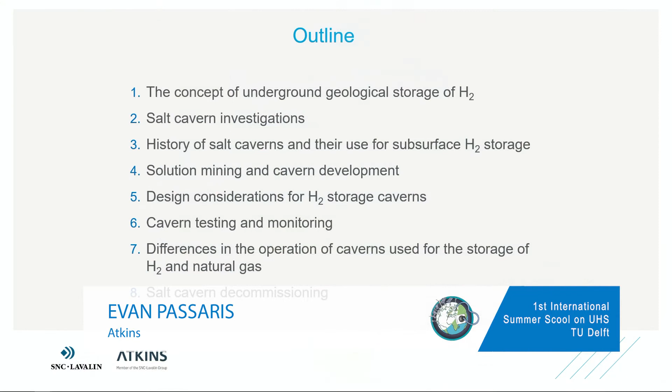Right. Very briefly, there's an outline of what is to come. You can read it later. Let's go straight into the actual presentation because we're running out of time. I was told very clearly by Hadi.

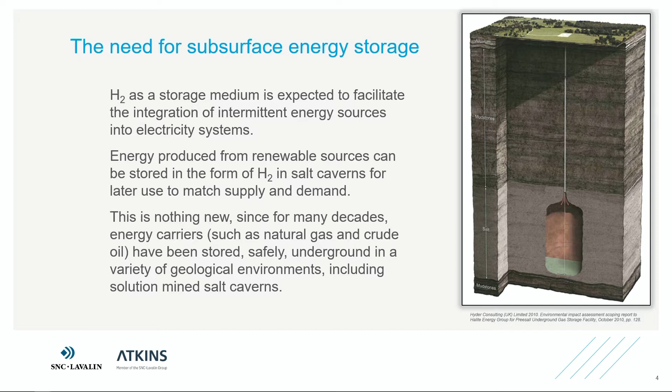So the concept of underground geological storage of hydrogen is obviously there because we need it. My predecessor here in the presentation explained why we need it, so I'm not going to say anything more about this. I would like to go straight and talk about what kind of investigations we normally need to implement in order to look at the caverns.

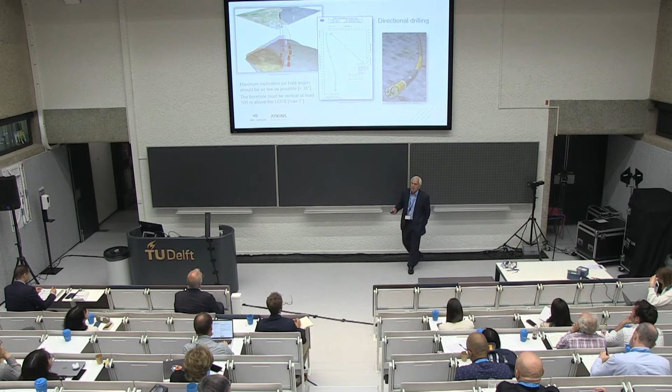We always start with drilling, of course. And the drilling nowadays is done by directional drilling. You have a platform from where you actually pad. You can drill several holes, which eventually are going to be the holes which will lead you to the cavern. The important thing is when you're using directional drilling to make sure that there are certain limits. The maximum inclination has to be kept below 35 degrees if you want to have an absolute control of the actual installation later of the completion.

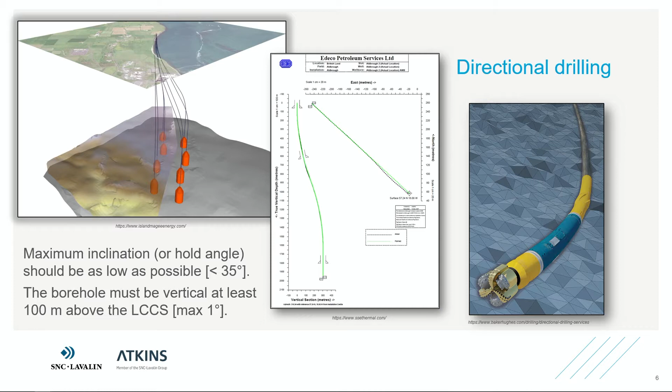And another point, as you are approaching with the drill hole in the location where the cavern is going to develop, you have to leave at least 100 meters above the cavern where it has to be vertical. The hole has to be vertical for absolute control of the operations later. Maximum inclination should be 1 degree there.

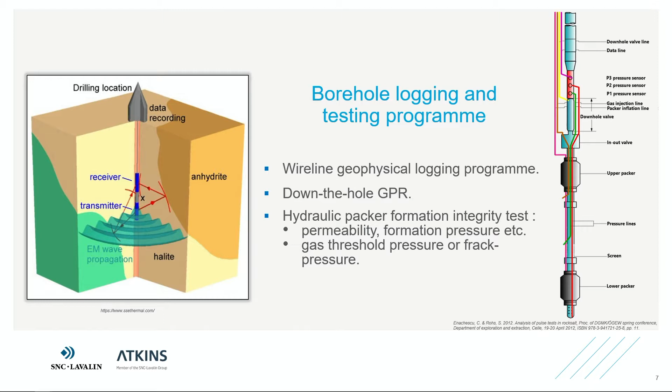Once you drill the hole, a number of down-the-hole tests need to be implemented in order to get the details of the properties of the geological formations that lead from the top to the very bottom. And once you're finished with the classic geophysical logging program, there's another set of tests that you can do. They're optional. Down-the-hole ground penetration radar is one of the techniques which you normally employ in order to find any abnormalities that may exist in the area where we'd go and develop the caverns.

And of course, we need to use the hydraulic packer formation test, which will allow you to determine the in situ permeability of the salt and also to define what is the threshold pressure, or if you like, the frac pressure of the salt in particular.

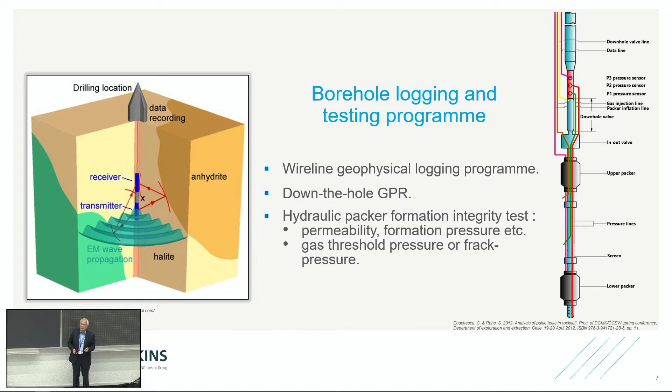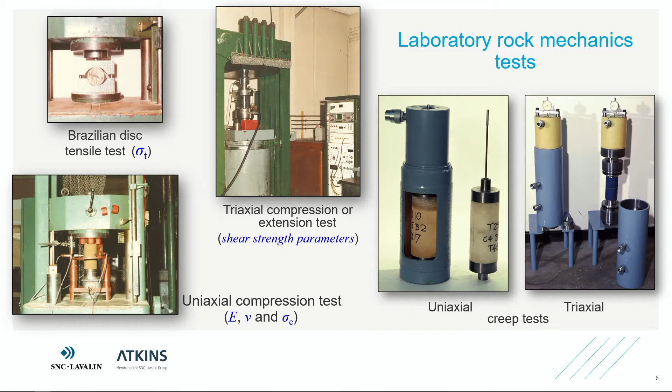Once you developed the drill hole and you finished with your tests down the hole, every core which has been collected needs to be taken to the laboratory. There's some physical tests, there's some mineralogical tests, the tests which are used for the design of the solution mining techniques that are going to follow, but equally important, we need to do some mechanical tests to find the characteristics of the salt in particular and some of the other geological materials.

We need to know the quasi-static properties of the salt. By quasi-static properties, I mean, for example, the Young's modulus, the Poisson's ratio, tensile strength, uniaxial compressive strength, and of course, the shear characteristics, shear strength.

But equally important, you need to know the creep characteristics of salt. Salt is a unique material that creeps continuously when it's loaded, and we need to define the characteristic parameters which are used in the modeling of the time-dependent behavior of salt by using special techniques.

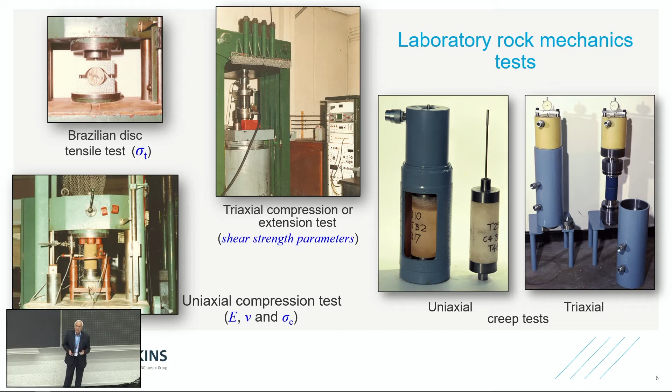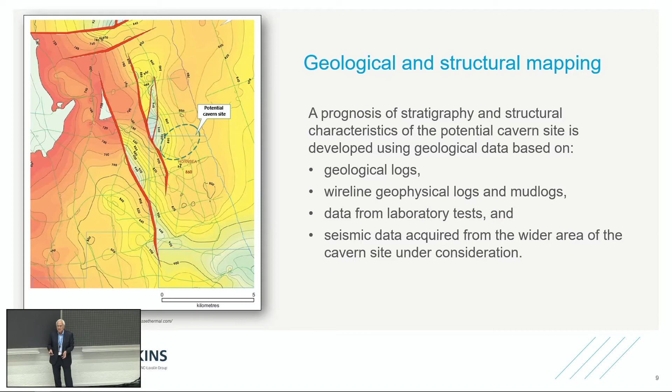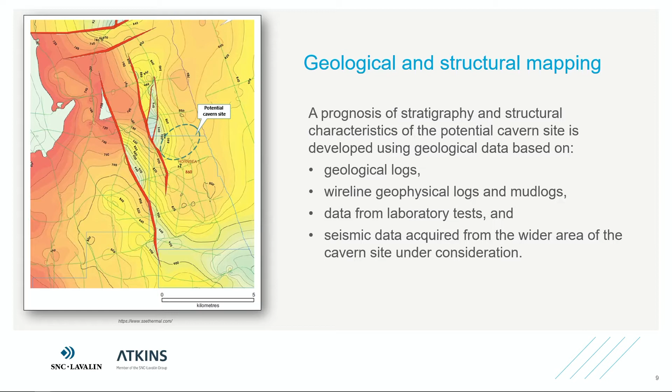Having gathered all this information, which is the results from the drilling of the holes, the in situ tests inside the wells, the laboratory tests, and of course, all the information that we have from the seismic surveys in the area, we can build a holistic model of the geological area we're going to develop the caverns so that we can decide where is the best optimum location, if you like, for developing our caverns.

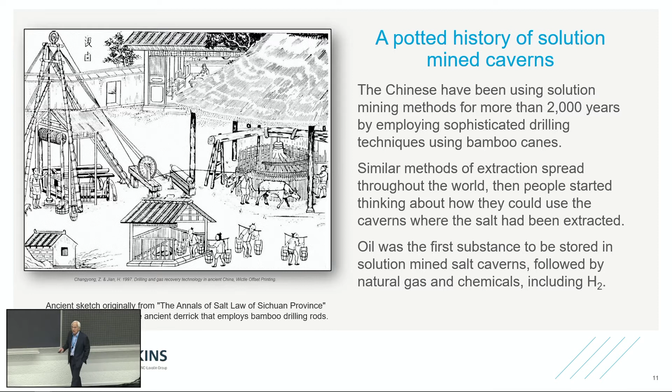The history of salt caverns is an old one. 2,000 years ago, the Chinese started extracting salt with bamboo techniques, bamboo sticks. Originally they were interested in the salt, but they ended up producing an empty space. Years later, when the rest of the world started using the same solution mining technique, they thought: wait a minute, we create a big space, can we use it to store something inside?

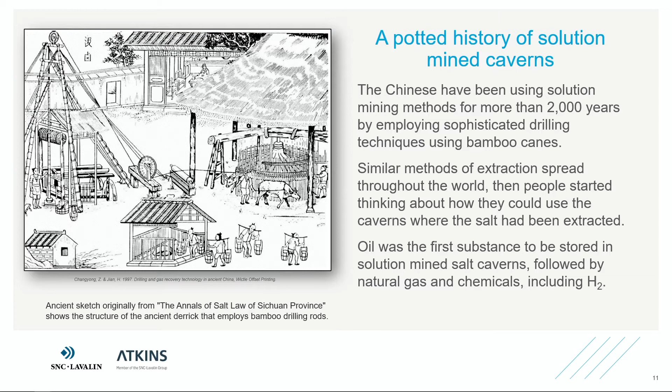They started storing originally oil and hydrocarbons, natural gas, and of course since the mid-60s, mid-70s, we started using hydrogen. Hydrogen was stored for the first time in the UK, and it's there to be used, the technique, nothing new about it.

Already we have 3 large caverns in the United States in salt domes. At the moment they're operated by ConocoPhillips, by Praxair, and of course by Air Liquide. They're not used for producing energy. It's stored and used specifically for various processes required by the companies.

In the UK, since the early times when ICI used to run the show for the salt caverns in the United Kingdom, we had 3 caverns. We still have them there. They're operating nicely in Teesside. They're small caverns, no more than 75,300 cubic meters capacity. They're at a relatively shallow depth, no more than 365 meters.

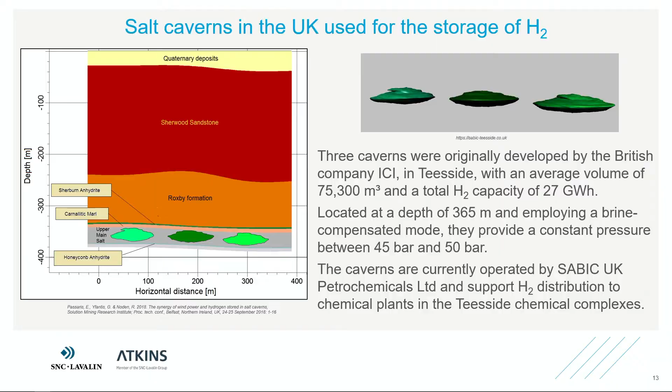They are peculiar shapes, as you can see, like flat pancakes. The reason why they're still like this is because the thickness of the salt is relatively small, and if you want to maximize the volume, you have to make them large diameter and flat. They're also quite unique in the sense that the roof of the caverns is very close to the overburden, which is a problem, because you have to keep at least 90 meters from the overburden.

And for this reason, we can't use these caverns as dry storage - they have to be wet storage. In other words, we're using brine as the means of injecting brine inside and expelling the hydrogen, or if you want to later inject the hydrogen, the brine has to be thrown out. Of course, they're not actually throwing out the brine - they have large ponds of saturated brine that they use for that purpose.

So that's the case of salt caverns in the UK. When you are in the business of developing caverns to be used as a storage facility, we employ the technique of solution mining. It's a straightforward technique: you drill a hole, you lower 3 tubes. The first tube is used for injecting water.

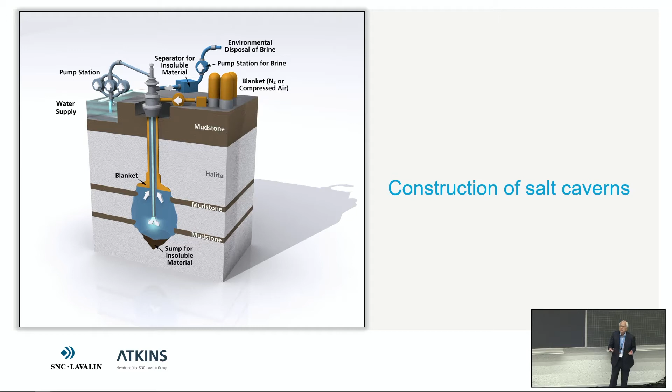You don't need to use fresh water, you can use seawater. Seawater is not fully saturated, therefore capable of dissolving salt. Once you've dissolved the salt, you produce brine. The brine then comes out on the surface through the second tube, and you allow some of the insolubles which are in with the brine to settle down before you send it to the pump house.

From the pump house, you either dispose of it back to the sea in an environmentally friendly way, or if you're lucky enough to have nearby industry that uses the brine to produce sodium and chlorine from it, no problem. The third tube is used to lower into the cavern during development the so-called blanket.

It's an inert material - we usually use nitrogen or sometimes compressed air. In the past we used to use oil. That is to actually lower or raise the interface of the brine and the blanket, to allow you to control the shape of the cavern. You can actually control the shape of the cavern nowadays relatively well, and you can produce practically any shape you like within limits.

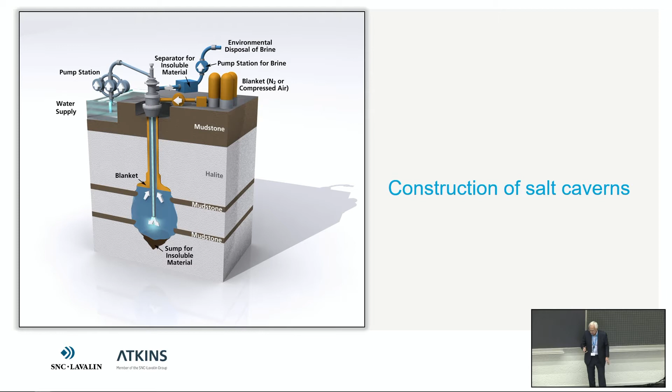So once the brine cavern has been created, you have to get rid of the brine. You inject the hydrogen inside, and as the hydrogen is injected into the brine cavern, it forces the brine to go out through the so-called debrining string.

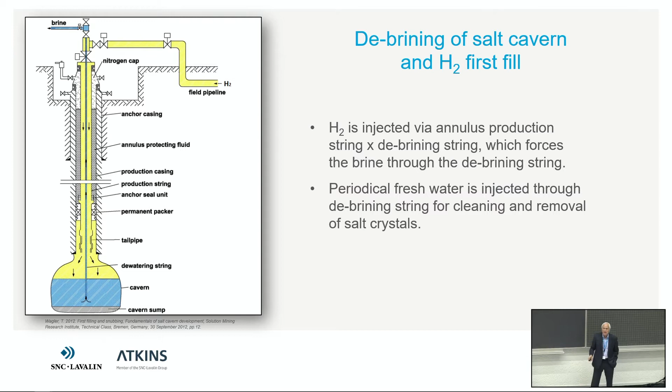Now that debrining string, which continuously throws out the brine - if you keep on doing it continuously, you'll block it, because salt normally deposits on the inside part of the tube. So every now and then, fresh water is injected inside the debrining string to control the dissolution process.

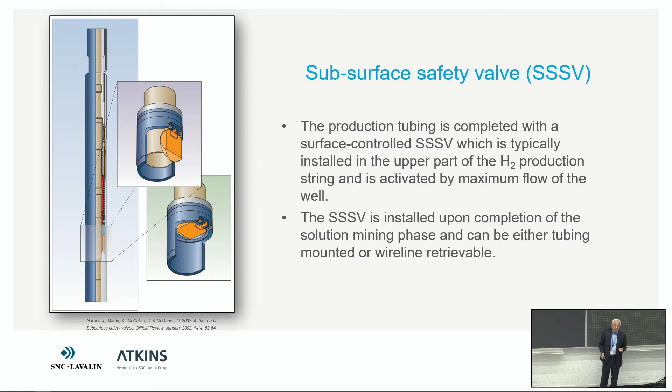One important thing that you need to have in a salt cavern used for storage of hydrogen is the SSSV, the so-called subsurface safety valve. This is installed not too deep, not far from the surface, to make sure that if something goes wrong at the surface, you don't lose control and have a blowout. So the SSSV is an important part of the overall system we have for storing hydrogen inside the caverns.

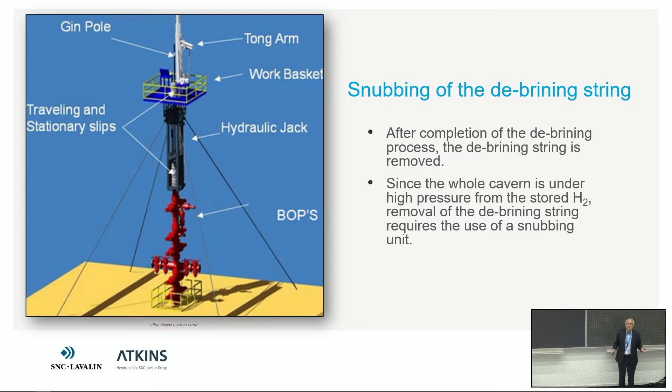Once you've finished with the SSSV, you have to start removing the so-called debrining string. Remember, the cavern is already at very high pressure with the hydrogen, so you can't just pull them out. You need a special rig, called the snubbing rig, and one by one, slowly and carefully, you remove the parts which form the string. After that, you're ready to start operating your cavern without any problems.

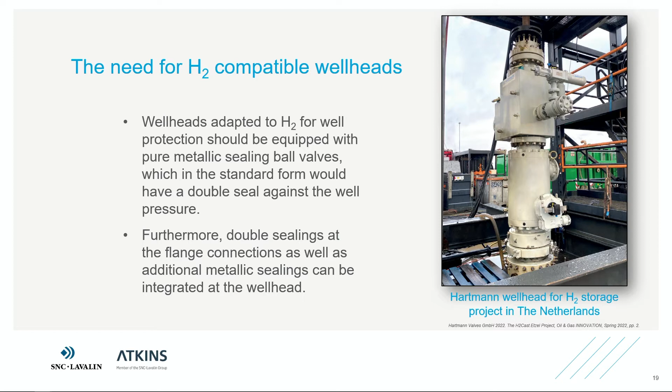But you need on the surface a very special piece of equipment, the so-called wellhead. We can't use anymore the wellheads we used to employ for natural gas. Nowadays we have to use special wellheads designed specifically for hydrogen storage. A number of firms are already in the business of producing that, and a number of these wellheads are already being tested and used in various projects.

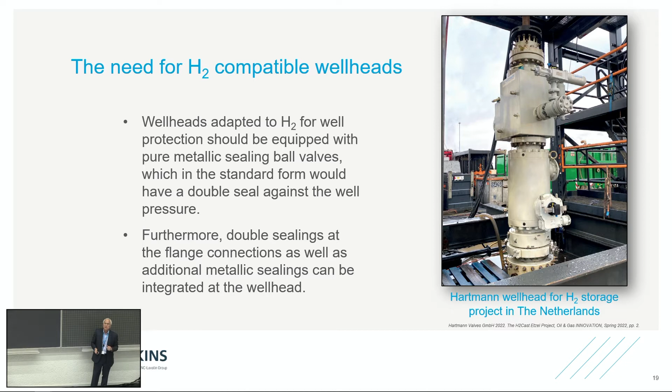The trick is to make sure these wellheads are equipped with pure metallic sealing ball valves, and in standard form they should also have a double seal against the well pressure. It's a straightforward technology to have these new wells used.

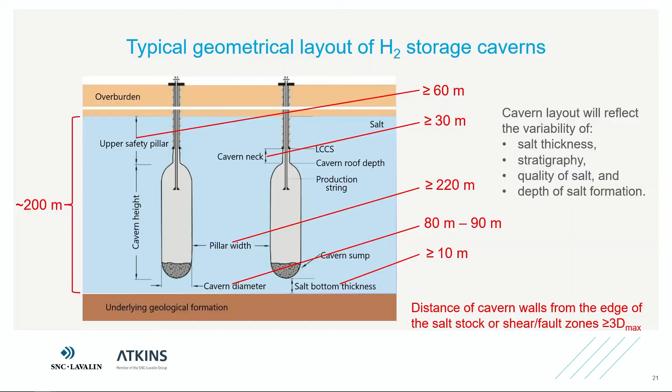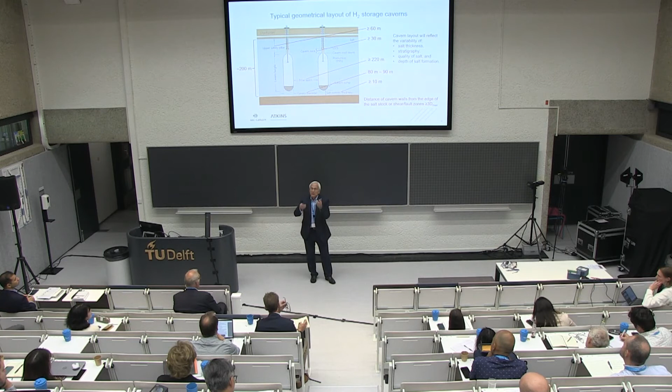But that's geometry. Let's look now at the operation of the caverns. Three things are important: your maximum pressure, your minimum pressure, and equally important, how fast you're allowed to extract or inject hydrogen into a cavern - not so much the injection, but how fast you can extract it.

If we look at the maximum pressure, when the pressure is high in the cavern, small microfractures are bound to open in the walls of the cavern, which means the permeability of the salt is going to increase, and hydrogen will be allowed to start moving outside of the cavern.

However, if that maximum pressure is kept at a reasonable level, then that zone of disturbance, of salt permeability, is going to be relatively limited. In my experience, it's not going to be more than a meter and a half. And more importantly, every time you lower the pressure, all the hydrogen that has gone inside the salt is going to come back into the cavern.

So, provided that you keep the maximum pressure below 80 to 85% of the geostatic stress at the depth of the LCCS, that's the important thing to remember, not in the cavern, at the depth of the LCCS, then you're okay. That will ensure that fracture creation of the cavern is avoided if you maintain this pressure less than the least compressive stress in the walls of the cavern. There's another thing you have to remember.

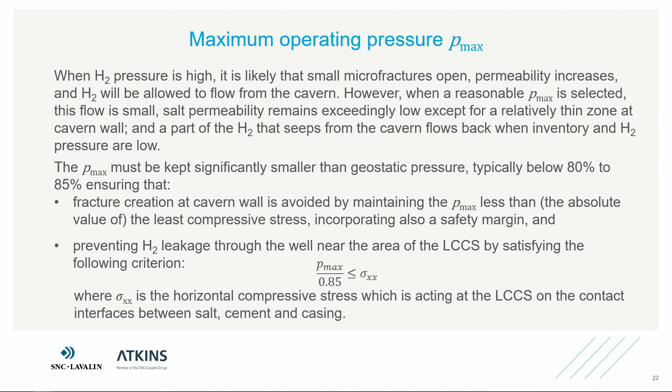If you have too high pressure, you may allow the hydrogen to start permeating behind the LCCS and through the interfaces between the cement and the salt, or the cement and the steel. To make sure this is not going to happen, you have to ensure that the confinement at the depth of the LCCS is high enough.

There's an equation we've been using for years in the case of natural gas, which is to divide the maximum pressure by 0.85 and make sure this is lower than the confining pressure you have from the horizontal direction. That is used for hydrogen storage caverns, and at the moment we may have to increase the safety factor a bit when it comes to hydrogen because it's more mobile.

Minimum pressure is normally designed so that you can control the creep and therefore the subsidence on the surface, and also make sure the integrity of the cavern is left untouched. We make sure that we normally have the minimum pressure higher than 25 or 30% of the geostatic pressure.

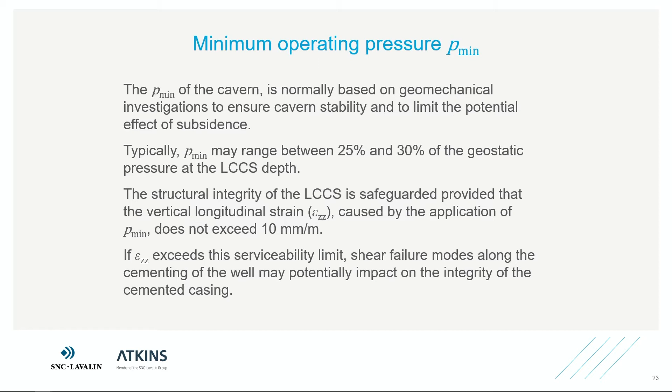Another criterion we should use is to make sure that if the minimum pressure allows the roof of the cavern to move, that movement should not permit the LCCS area to have a strain of more than 1%, in other words, 10 millimeters per meter. If that is permitted, then you're going to have problems with the integrity of the caverns, perhaps as a result of shear failure modes.

Maximum flow - at the moment you heard earlier figures saying about 10 bars a day. Believe me, nowadays we're using 20 bars a day without any problems. We have been successfully using 20 bars a day for natural gas.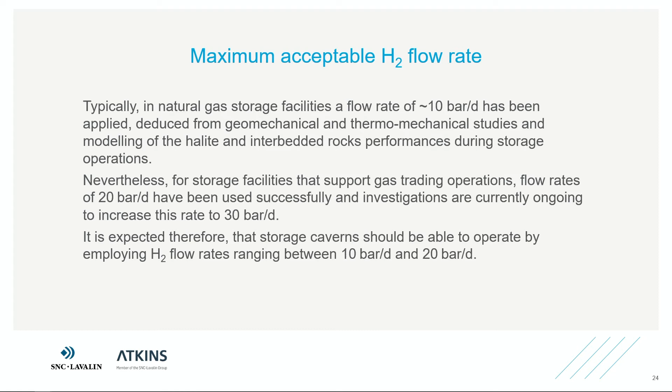And now, talking to you, we started about two weeks ago further work to define whether it's possible to go to 30 bars a day. My feeling is yes, we will be able to do that. Whether that will be okay for hydrogen is something to be seen and developed through practical experience. But at the moment, my belief is that easily for hydrogen we'll be able to have between 10 and 20 bars without any problems.

And to complete the design of the caverns, we have to realize that we need some geomechanical model of the salt caverns. This obviously takes into consideration all the properties developed from the material. We need to make sure we have a coupled thermomechanical analysis of the response of the caverns.

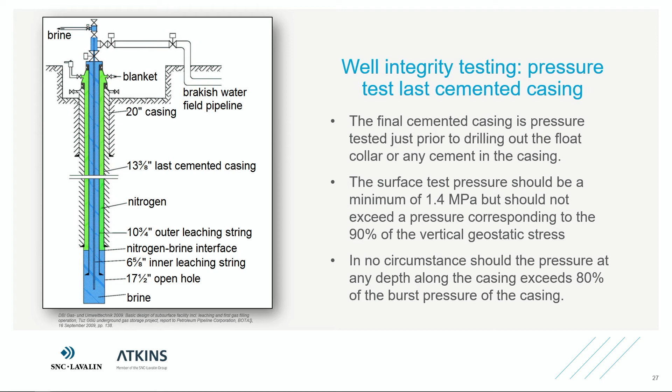If we look now at what we do for testing and monitoring, we always start, before developing the cavern, by testing the actual casing. You pressurize the casing before you develop the cavern, making pressure of the order of 1.4 megapascals on the surface, but making sure this pressure does not exceed 90% of the geostatic stress at depth, or indeed doesn't exceed 80% of the burst pressure of the casing.

Once the cavern is developed, you have to make sure it's tight and holds the hydrogen at depth. So we have to do a mechanical integrity test in which we inject the hydrogen on the top, just below the casing shoe, and we monitor whether the interface between the brine and the hydrogen is moving upwards with time.

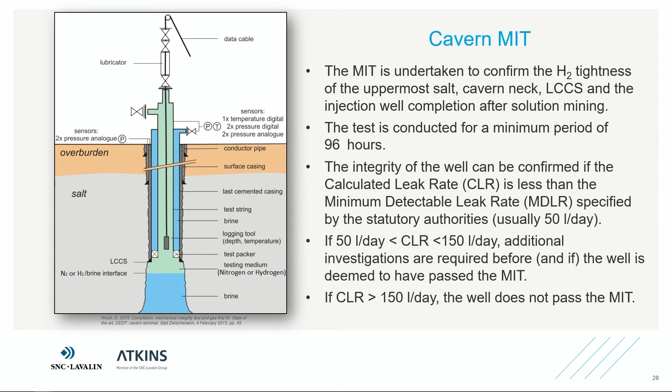It lasts approximately 96 hours. You need a probe that will monitor the interface between the hydrogen and the brine, and you determine the calculated leak rate, the CLR. This has to be less than the minimum detectable leak rate, which at the moment the majority of technical statutory authorities are defining as 50 liters a day.

What happens if it is more than 50 liters a day? Provided that it's less than 150 liters a day, you don't reject the well. You still need to do some further investigations, and if they're okay, then you end up using it. But if it is more than 150 liters a day, then you have to reject it.

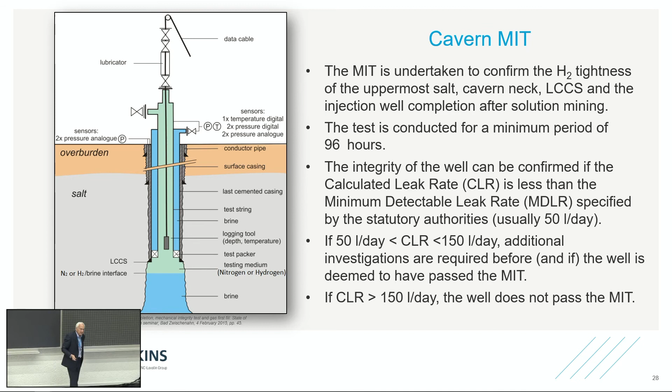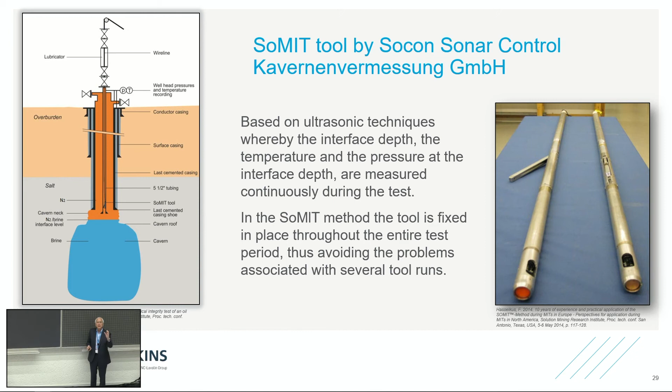In the last 5 or 6 years we've had a new gadget in the market which is ideal, because instead of using a probe to monitor the surface, we're using sonar techniques. It's a gadget called SoMIT by Socon, and it's a tremendous improvement because it allows us to increase the accuracy with which we monitor the interface, and we have better opportunities to do the MIT test.

What are the differences between the two materials? Unfortunately, the compressibility factor of hydrogen is more than one, which means that for the same storage conditions, hydrogen is not as effective as natural gas.

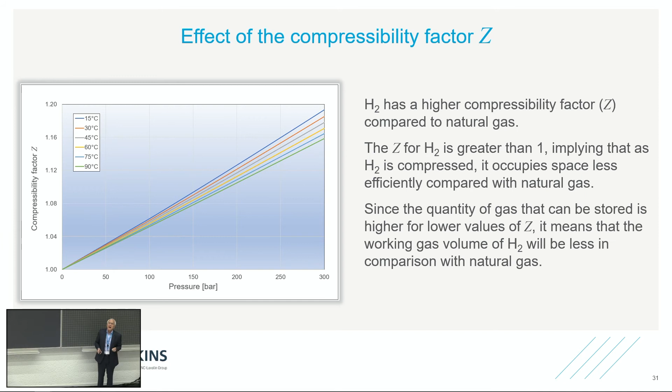If you look at the Joule-Thomson effect, that's good news because it's negative, which means we don't have problems during the thermodynamic operations of the cavern. Essentially it means we don't have the need to take care of problems with condensates or hydrates.

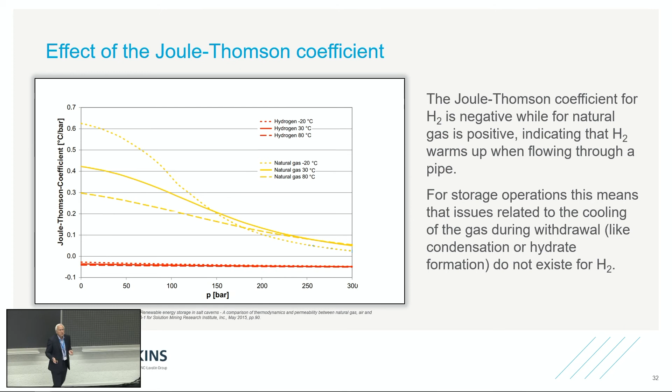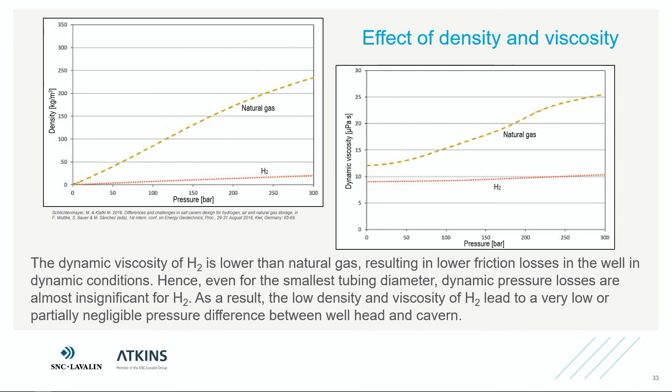If you look at the density and viscosity of hydrogen, you'll find that because of the dynamic viscosity of hydrogen combined with the density, the pressure difference between the wellhead and the cavern is practically non-existent, which makes life much easier.

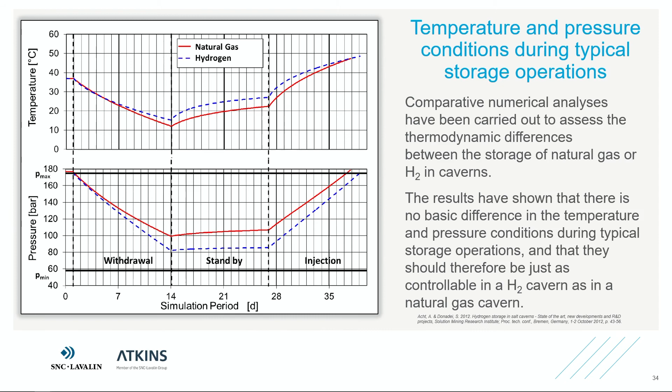If you look at the overall performance of the two types of caverns, modeling that has been done has shown there's very little difference between the two materials, and therefore we can easily control hydrogen caverns in the same way we have been controlling

natural gas caverns. Decommissioning is straightforward. I'm not going to dwell on it, you can see the results and details later. All I can tell you is we start at the subsurface.

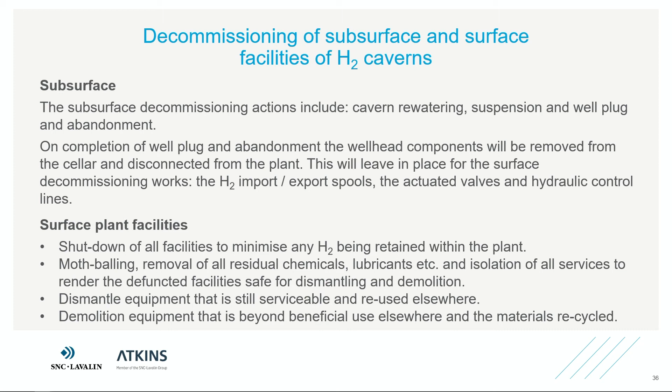Once we remove the hydrogen from inside, we hand over responsibility to the surface guys. The surface guys salvage whatever they can and throw the rest away.

When you come to abandonment, the technique is plug it, seal it, but make sure that before you actually plug and seal it, there's an equilibrium between the brine or water you put inside the cavern and the temperature which exists there. You have to leave some time to reach a relatively good equilibrium.

Sometimes you can spend more money if you want to heat up the brine you put in the cavern to speed up the process. It's a matter of deciding what to do.

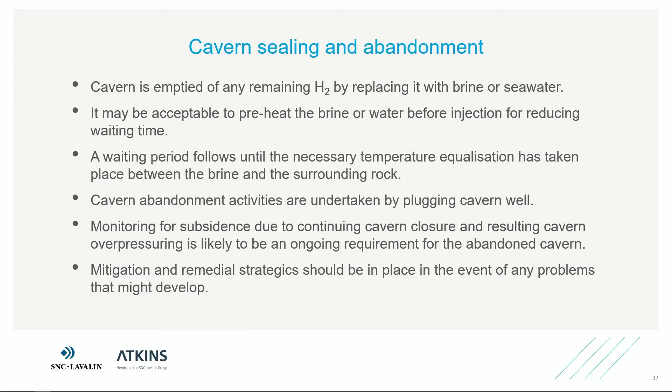There are 3 different techniques used to produce the cavern plugs, to produce good plugs, and please spend some time to look at them later.

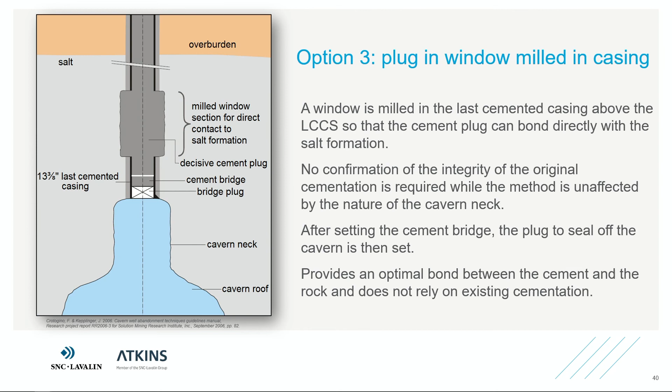This is the result of work done by SMRI, the Solution Mining Research Institute, which leads all the international work done on solution mine caverns for storage purposes. Thank you for your time.